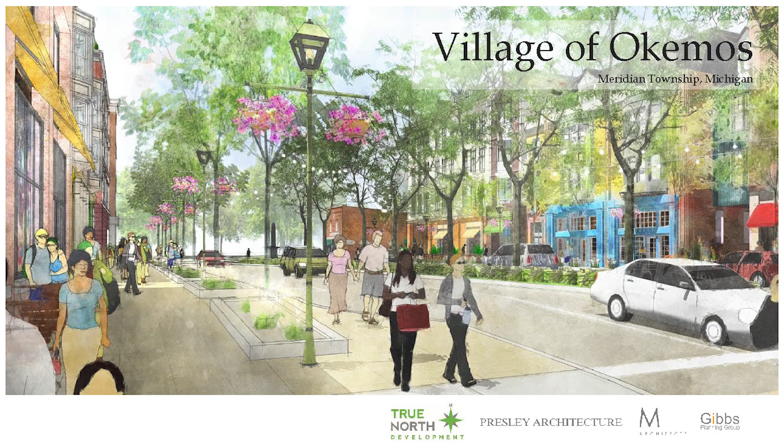Thank you, Kate. I'm going to be moving around, up and down, so I might sit in your seat in a minute. First, I want to give you a perspective on what you're looking at here. This is a view looking down Hamilton Road toward the west at Okemos. If I'm standing on the southwest corner of Okemos and Hamilton looking west down Hamilton, you can see the Hamilton building in the background, which, no matter what happens in this project, will be saved as an historic building. That'll give you reference to what we're looking at.

The presentation you're seeing tonight was put together by myself and my company, True North Development. I'm Chief Operating Officer and lead developer for this project. Presley Architecture out of Northville is involved, and we've also got Hobbs and Black out of Ann Arbor working on the project, along with Gibbs Planning Group. The presentation you're seeing tonight is actually the one given by Bob Gibbs himself to the Board of Trustees a couple of weeks ago, and then given by another staff member from Gibbs to the Planning Commission earlier this week on Monday night.

We've presented a concept plan, and that is purely that, in the eyes of the township. It basically sets the bar and sets expectations. We have basically set the footprints of our buildings in our first phase.

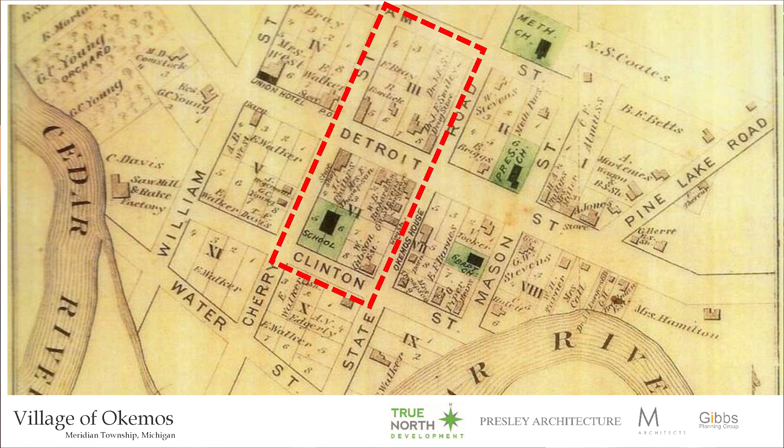The grid and block pattern here is the most efficient block pattern we could possibly use, and we're going to duplicate and utilize it. Bob Gibbs of Gibbs Planning said this is one of the more well laid out sites he's ever worked with, out of thousands around the country. So here are the two blocks we're looking at for phase one — block 1 on top, block 2 on the bottom.

State Street is what's now Okemos Road. Meridian Township has a current population of about 43,400 people, with an average income of 100,000.

You said Detroit Street is Okemos Road — are you sure that's what you meant? No, that's not what I meant. State Street is Okemos Road, yes. Detroit Street is Hamilton. Keep me straight — so 43.4 population, average income of 100.

Here's something really interesting: the demographic profile we're looking at for residents to rent the proposed rental properties is 1 to 2 person households, which make up 68% of Meridian Township. That's a much higher level than most people think.

We're seeing this demographic come at us from two directions — millennials who don't even want to consider buying a home, and long-time homeowners tired of maintaining a big property who are gone six months a year to Florida anyway, and just want a nice apartment to come back to. Although these two demographics seem very different, they like to cohabitate and live in the same places, so we're seeing them come back into urban settings. This is probably the most urban setting Meridian Township will see — it's a relative term, but that's the real attraction.

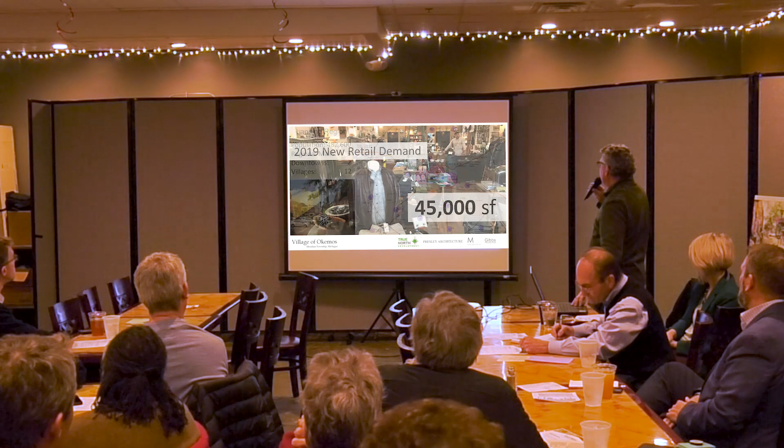We're taking that breakdown one step further, taking somewhat of a rifle approach and assigning preferred uses to the various retail spaces we have to lease. We're going after specific users for those spaces, kind of a limited offering approach.

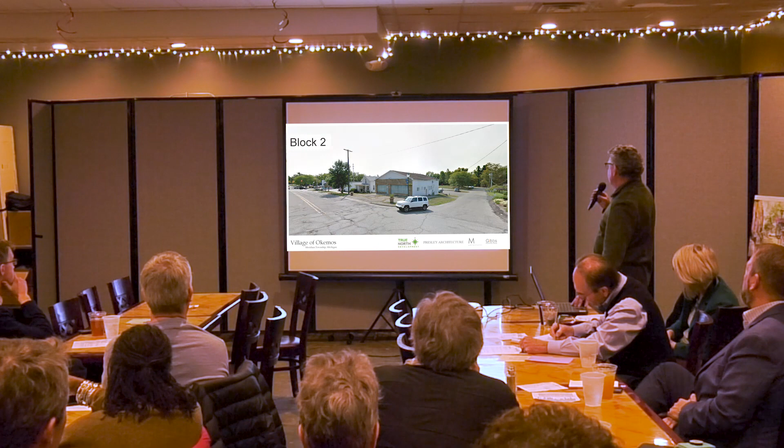This is the existing conditions that we're all too familiar with. There's our beautiful bottoms-up corner. I'm just going to run through these quickly to refresh everyone's mind what we're looking at today.

One of the things we're going to be watching through the project, and I challenge you to watch it too, is what's referred to as a WalkScore. There's an app you can get on your phone where you put your address in and find out your WalkScore. We believe we're going to take downtown Okemos from around a 50 right now, and we hope to get up to something close to what you'll see in downtown Petoskey today, which is an 85 or 90.

In that scenario, we're also addressing pedestrian safety, but also bicycles and how everybody shares the road with the cars.

We have a very unique situation in that we've got a 15-acre park that's very underutilized immediately to our south. So we'll be working diligently with the homeowners along Clinton Street to try to program some connections, some really strong connections through the wetlands and additional sidewalks or trails to establish that connection down to Wonch Park.

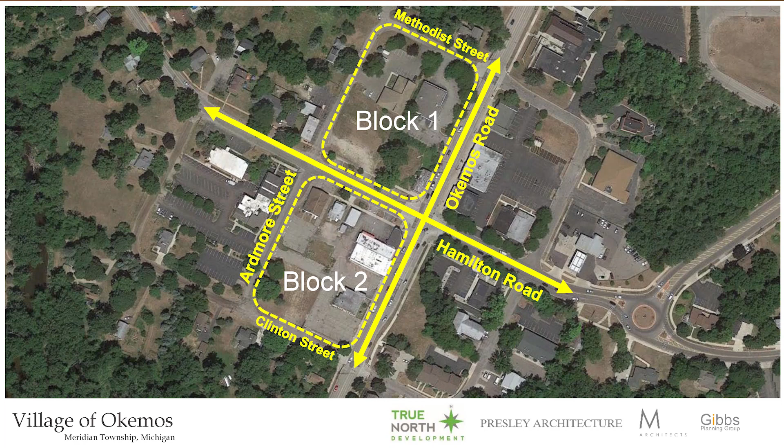The next phase that would be developed, assuming these two are successful, would be to go to the next block to the west, where Douglas J. will be leaving that building and coming to the new building at the corner of Okemos and Hamilton.

Along Hamilton Road, we've got apartments over retail. We thought it was very important to put both sides of Hamilton in the first phase of construction because that's what's going to create that place. And that's the real amenity of this project is the place that's going to be created.

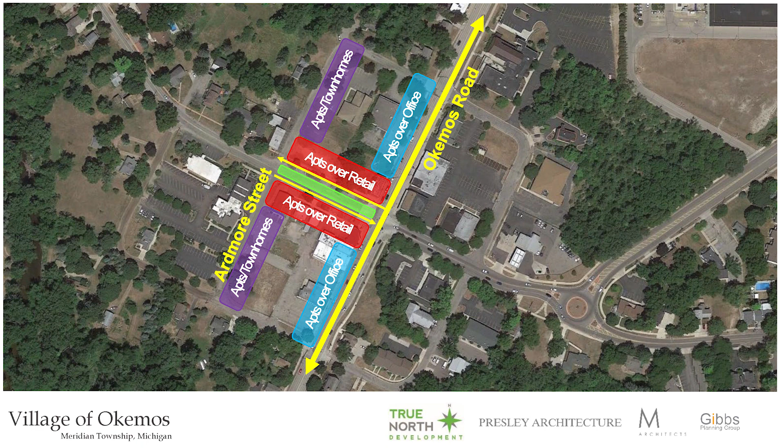Along Okemos Road itself, we can't put parking in front of those buildings, so we're looking at apartments over offices along the Okemos Road frontage. Then along the Ardmore Street frontage on the backside, we go to a purely residential use where we have townhomes on the top and bottom of the building and flats in the middle. So that's pure residential. The parking is interior to the buildings. It's almost a Texas donut, as they refer to it in the development business, where the parking is wrapped by buildings.

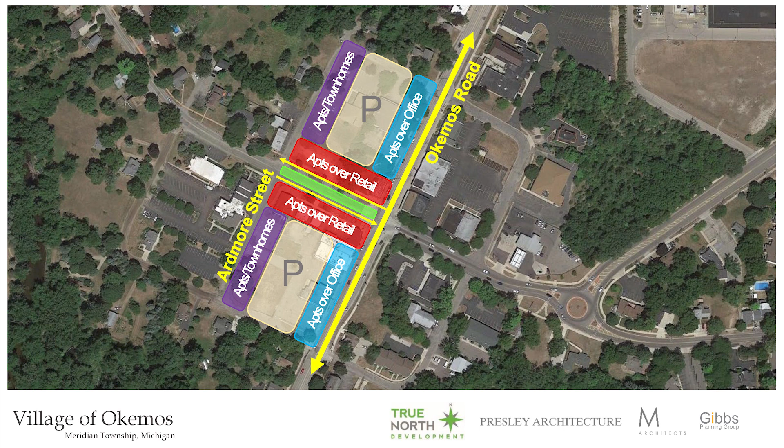Block 2, to the south, gets an entire level with 206 parking spaces below grade. Those 206 spaces will be the priority parking for tenants who choose to live here full-time.

We've got a total of 40,000 square feet of retail coming in this first phase, along with 27,000 square feet of office, 20,000 of which will be allocated to a collaborative workspace.

We have a national company that has come to us, and we're working with them on a Lansing site too. We're excited that it's coming here because it's truly an amenity to the demographic that's going to be living here. It'll be something like what you've seen with WeWork and/or Regus - a new startup company involved in that industry.

We're going to have 8 to 12 service businesses and 3 to 5 restaurants. We made the sidewalks on the north side of the street wider so we can better accommodate curbside dining in nice weather. We want that wider sidewalk on the south-facing side of the street. Again, walkability is going to be a real focus.

Also, signage - we're going to be encouraging vintage type, very eclectic signage that's going to be very unique. And again, outdoor dining spaces that will be seasonal, coming and going. We always park cars on one side of the street, which provides that barrier and some safety for people dining on the sidewalks.

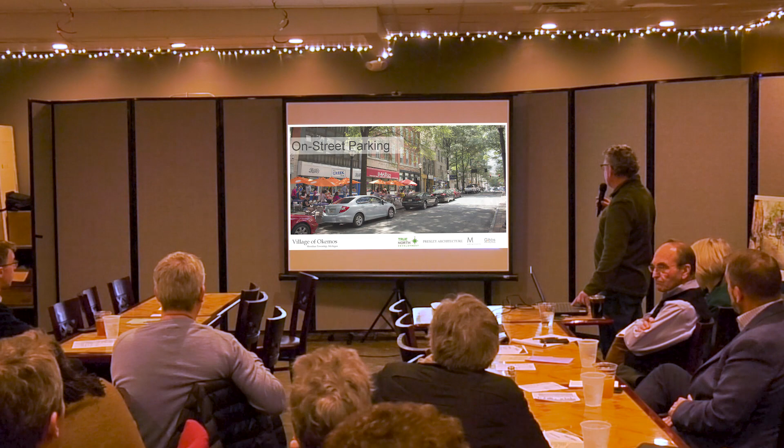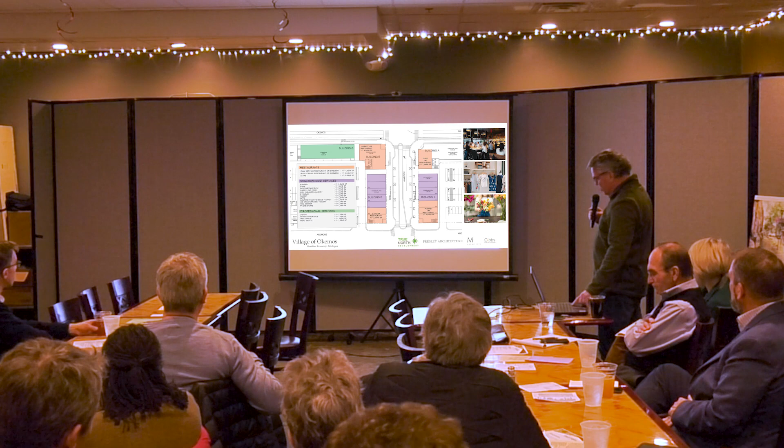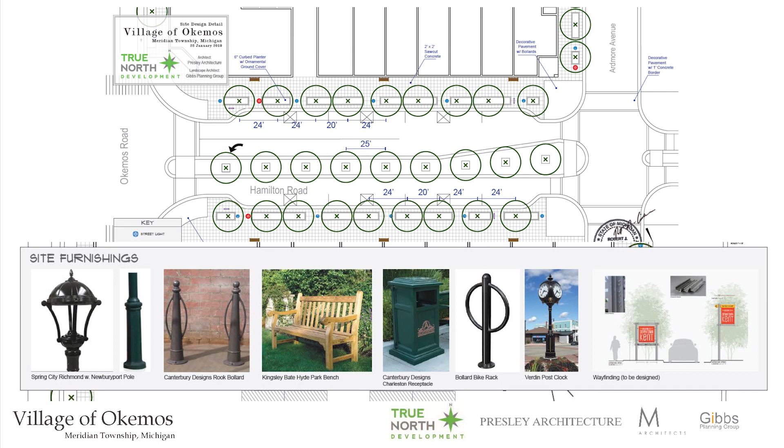This gives you an idea of the level of detail we're going into regarding the streetscape. This is still a work in progress - we're playing with the idea of snow melt under the sidewalks on the Hamilton Street corridor. These site furnishings give you an idea of the level of quality and thought going into all of this. This is the streetscape program.

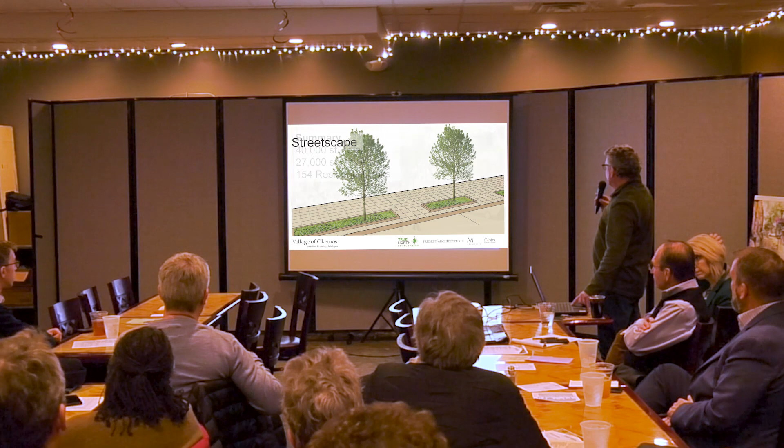Summary: 40,000 square feet of retail, 27,000 square feet of office, for a total of 276,000 square feet of buildings in the first phase, in 5 separate buildings, and 154 residential units. This is a reduction from where we were early on when we talked to this group. Due to the planners and architects involved, we think there's an appropriate scale and an appropriate style for these buildings.

Now our plan and our challenge is to figure out if we can afford to build the buildings that we'd like to build. This is somewhat of a 'go to the end and back up' situation.

As you know, we've established the TIF program back with the DDA in downtown Okemos, and that's going to be the vehicle we use to establish the TIF district. We'll be able to recover these public infrastructure costs that are so great, including the environmental cleanup and the brownfield.

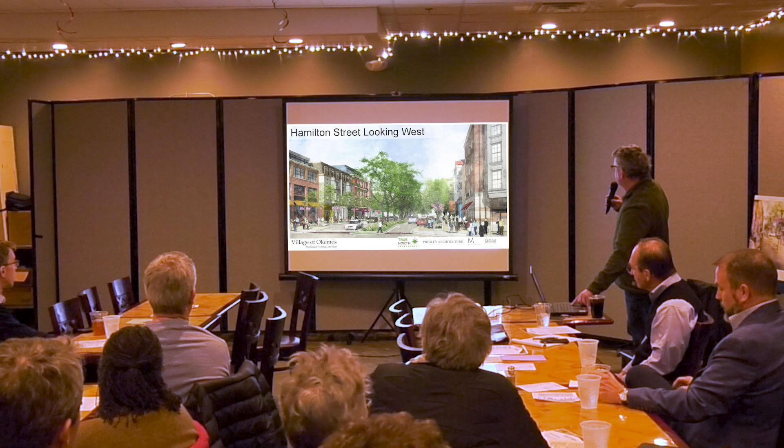I'm now going to let Robert Miller step in and give you a bit of the architecture. Understand that the footprints and heights of these buildings are much more set at this point than the actual facades and elevations. We're starting that study now and trying to identify the various materials. So some of the specific questions you'll have tonight, we're probably not going to have answers for yet, but we promise the answers are coming.

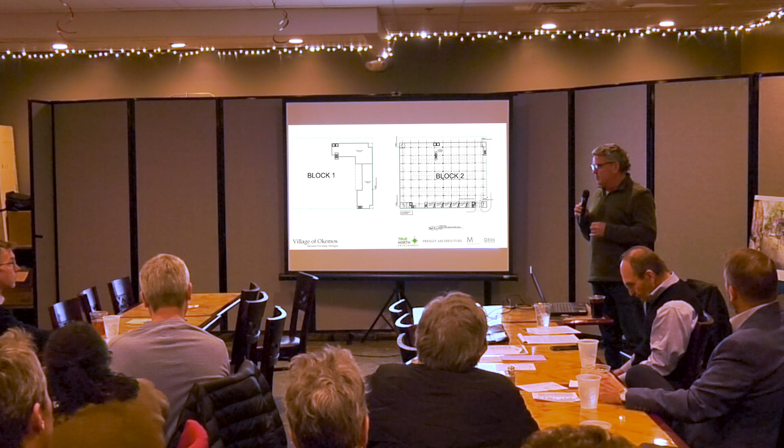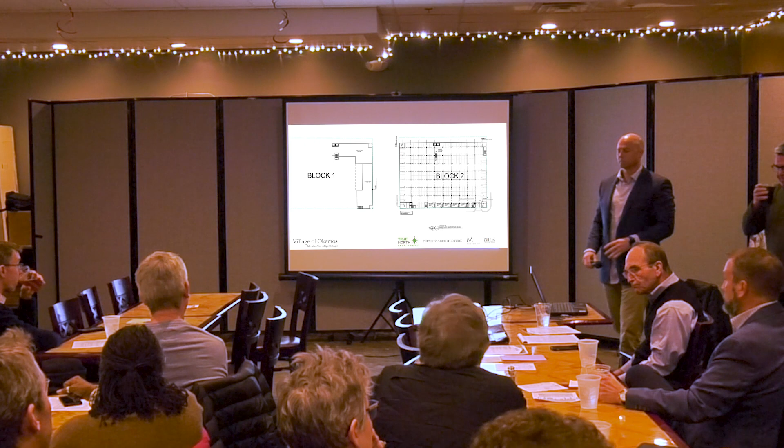Go ahead, Robert. Can everyone hear me if I don't use the microphone? Okay, great. Good evening, I'm Robert Miller with M Architects, one of the architects. The cameras need it. Oh, the cameras need it, okay, all right. Sorry, I really don't. Technology.

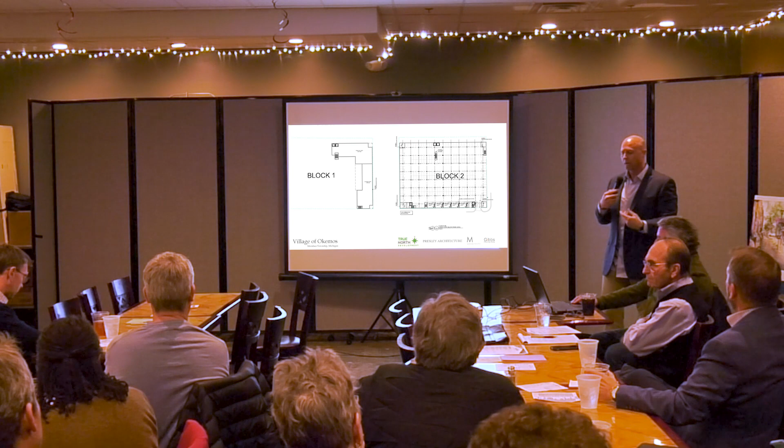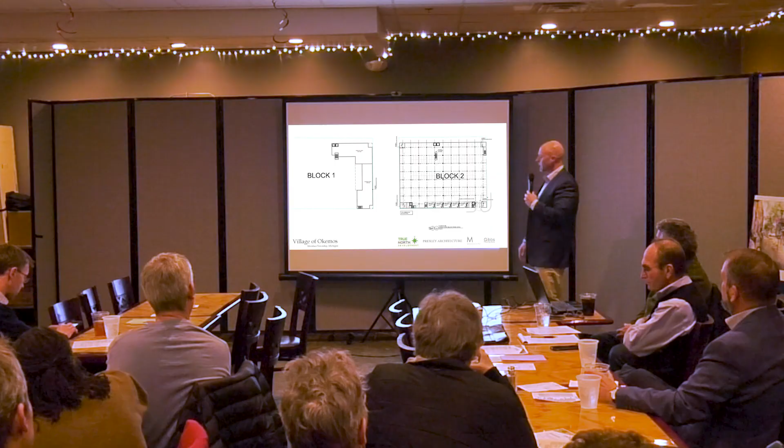If we take a look at the floor plans, Block 1 will be on the north side of Hamilton, Block 2 on the south side of Hamilton, with Hamilton coming straight through and Okemos up on top. What you're looking at is technically the basement level—basement underneath Block 1, and Block 2 is what we're calling the underground parking.

However, it's kind of underground, not underground—almost like a walkout basement, because we have a low point at Clinton Street and another low point up at Okemos Street, with high points throughout. So this part here is actually down at grade level at Clinton and Ardmore. When you pull into the parking structure, you're actually pulling in at grade.

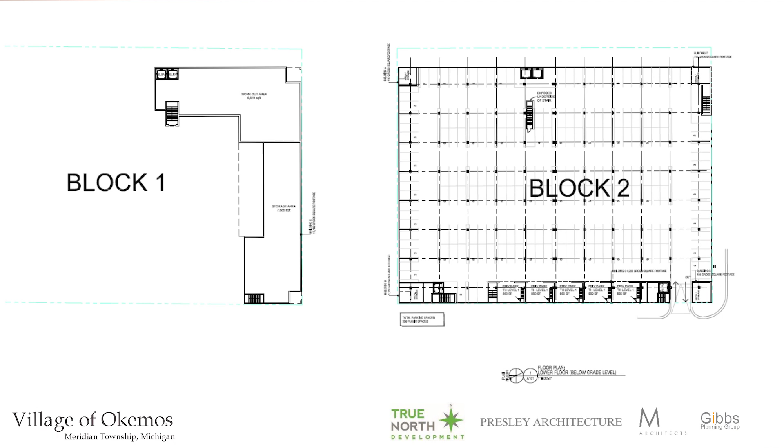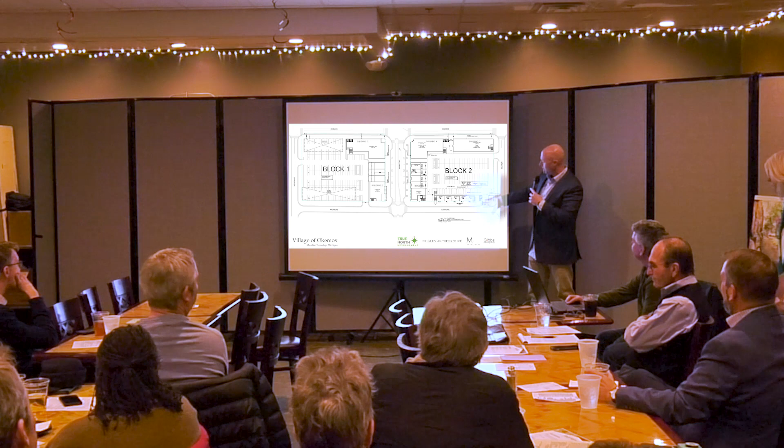You're not dropping down. So if we go up one more floor to the first level—sorry, Will, thank you—as we come up, we experience this at Clinton and Ardmore, where we're driving underneath the actual ground level of the project. This will be the ground level, the first floor.

We're going to have retail along all corners of the building along Hamilton, on both sides, so Hamilton almost becomes our main street—this becomes the center core of Main Street. We'll have Douglas J up in the corner, more as the entry gate point into the development, and ground level parking behind the spaces with townhouses along Ardmore.

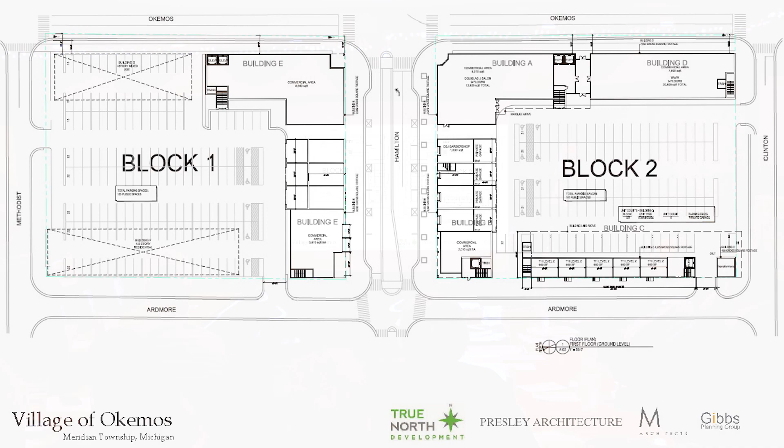Going up one more level, at the corner of Okemos and Hamilton, we continue with the second level of office space and retail space, again Douglas J, and then we begin our residential units. The second level will be residential units, and the third level will be residential units as well.

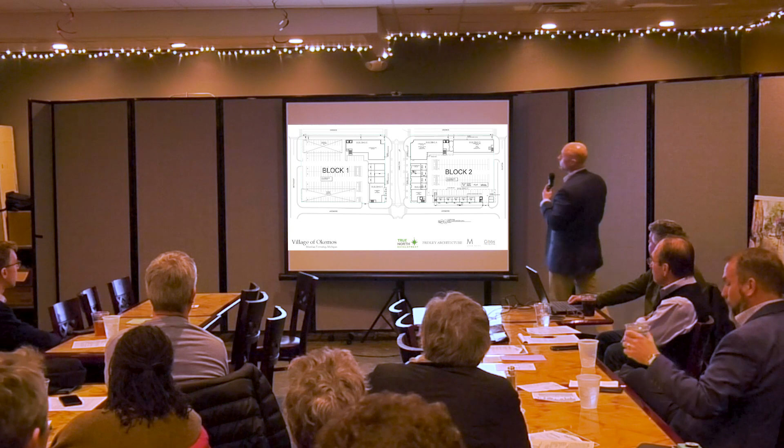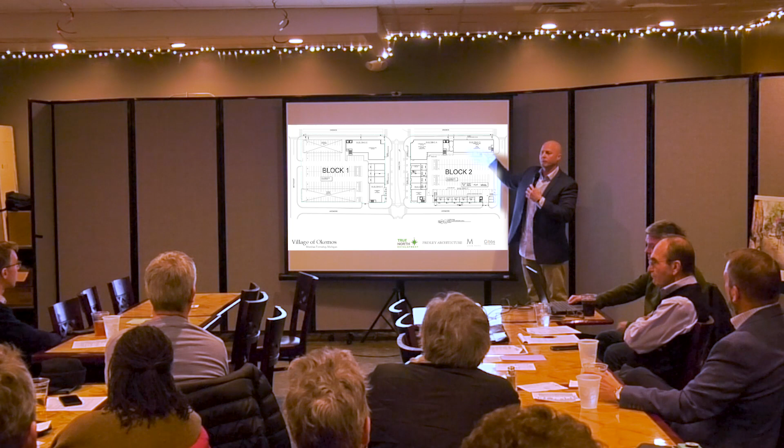The fourth level will be residential units, but importantly, in certain areas, though you probably can't see it, these areas are actually not units—they're terraces for amenity spaces on the upper level. We want to pull back the height, reducing the scale and proportion of this building to reduce its size and impact.

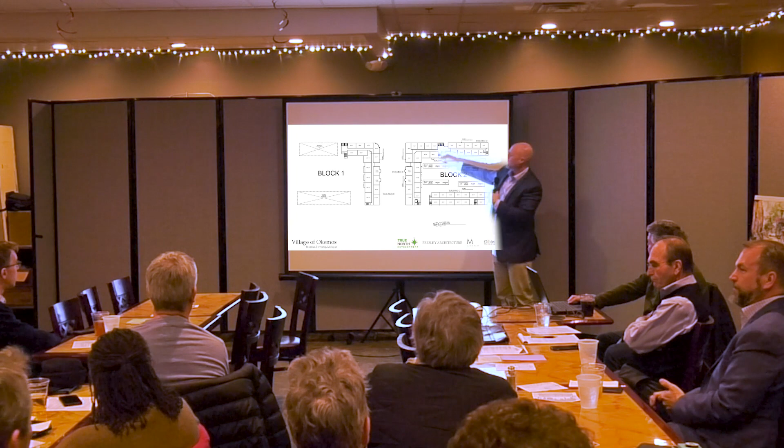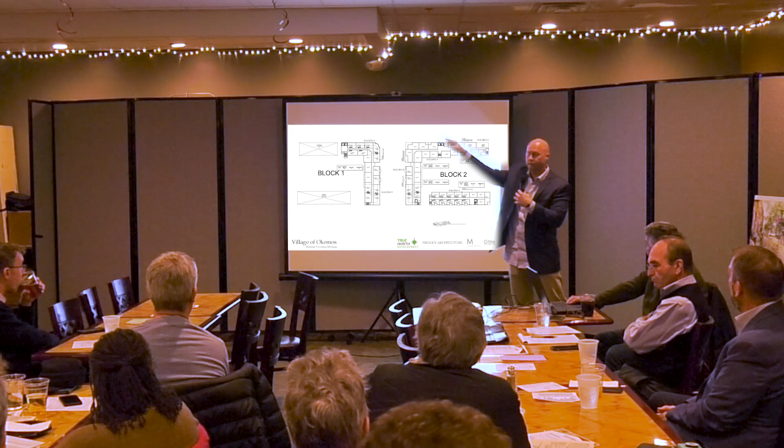So we start cutting out corners so that we're not looking at 5-story buildings—we're not even looking at 4-story buildings. We're looking at 3-story buildings with setbacks for 4th levels and setbacks for 5th levels, which, if we get to the 5th level, we've drastically reduced. According to the ordinance, we could build a 5-story building on all these blocks, but we felt that was too much development for this village.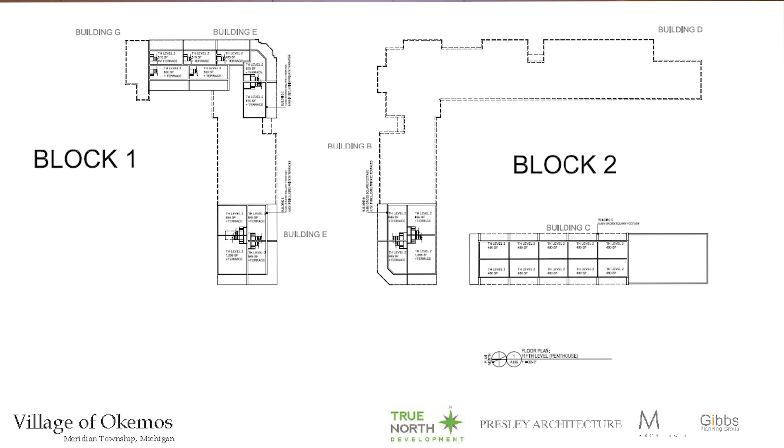So we're only looking at small areas and pockets with 5th floor levels, and even then those are set back 10 feet from the 4th floor below. So when you're on the street facade, you don't really experience that 5th level, and in some cases you hardly experience the 4th level either—that'll be a rooftop terrace. Those 5th floor areas are only reached from within the townhome that originates on the 4th floor, just so you know.

They're 2-story townhome units at that level. And that was it.

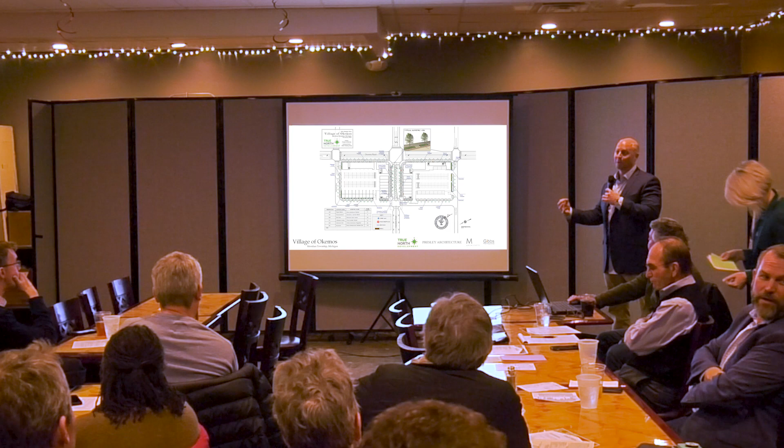I want to do that pretty quickly because I'm sure y'all got questions and want to meet up with us. So I wanted to go through that pretty quickly. At that point, I'm going to pass it back over.

Okay, perfect. So what we're gonna do is go through some of the more general questions. If there's any other general questions, throw them up in the air, Caleb will come around and grab those, and we'll go through some of the big picture general questions together, then break out into smaller groups.

We're gonna start with the questions about this stuff, and I'm gonna let Genti... we'll save traffic and environmental questions for after his part. We'll answer these questions now while he's changing over to his presentation, and then do the same for traffic, if that makes sense.

So the first question we're going to go through—as Will said during the presentation, some of these are things we don't quite know yet. But one question I think a lot of you would be interested in is what the anticipated rent for the units will be, and if there will be any condo units available at this point.

So Will, you want to tackle the rent question? Yeah. You want to talk about the research that's been done so far? We actually know where the rents need to be, and that's what drives what we can afford to build.

The other improvement we are proposing is to add a left turn lane between Methodist and Clinton at this phase to allow lefts onto Hamilton from Okemos Road. Right now, these lefts are made at Methodist and Clinton, which are not really meant for that. Especially at Clinton, if you are making a northbound left, you are stopping on the through lane, blocking through traffic, essentially cutting the capacity of that road in half. It also leads to unsafe behavior because you're waiting for traffic to clear from the southbound movement, and everybody knows how busy this road is, so eventually you will just go for it. By removing the left turns at these points, we're allowing them at the intersection of Hamilton and Okemos.

The other improvement we are doing is on Hamilton Road, as Will touched upon, we're introducing a boulevard there. That boulevard serves different purposes. One is it better allows us to align the road's cross section with the new changes we are making to the east leg of the intersection, but also serves as a traffic calming device because vehicles tend to slow down as they're going through the area. So you can imagine driving through here all the way up to Deliverance, vehicles will probably have to slow down because of the boulevard and the parallel parking. Also, the median serves as a refuge for pedestrians crossing the street. It creates a more sense of place and a more walkable environment.

So that's the general idea of the traffic study. This traffic study was actually approved by the county as of last Friday. Overall, level of service will remain at acceptable levels, and we project to see some improvements for the westbound movement on Hamilton as well as the northbound movement on Okemos.

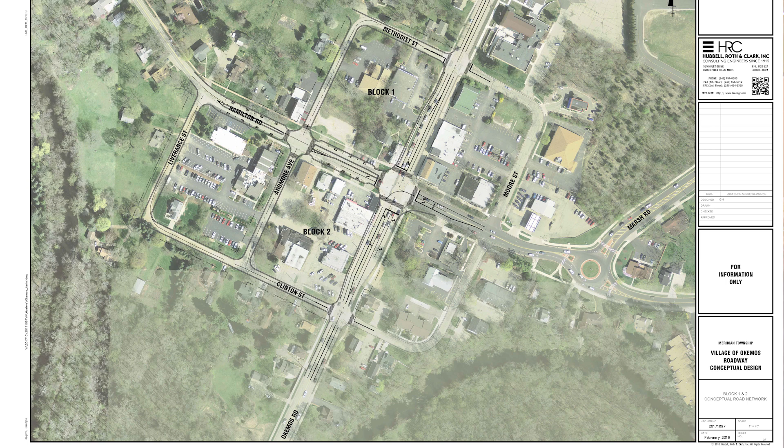It hit on the fact that we're given 14 feet of land and the accommodation of a bike lane. So the goal is to widen the street from the center line westward. Basically, we're adding 10 feet that doesn't exist right now for the left turn lane, and an additional 4 feet for the bike lane, which at this point will go from the project limits at Methodist all the way to Clinton, and hopefully once new projects come online on the other side, they can build on that connection.

Alright, so we had a couple of traffic questions. Can you talk a little bit about how some of these changes will reroute and change traffic around Okemos Road? In particular, it wasn't one of these questions, but I've heard repeatedly concerns from neighbors along Hamilton about people cutting through. Can you talk about how some of these changes will affect that, please?

Sure. So with the first question on Okemos Road, we're not really rerouting any traffic. The volume on Okemos Road will remain there. There's very limited options to get to the freeway, so we recognize that, which is why we're making these accommodations. As it relates to Hamilton, we're not projecting any cut-through traffic. One reason is the boulevard will serve one purpose: it will slow people down. The signal itself will also slow people down because it doesn't really prioritize Hamilton, it prioritizes Okemos. So those are some of the things we're doing to minimize those issues.

And then another question we had, it's probably going to be kind of a shared question, but the construction itself, the impact of the construction itself, whether that be on traffic, on the nearby areas and the neighbors themselves, can you speak a little bit to the impacts of the actual construction? And then we'll go to kind of the...

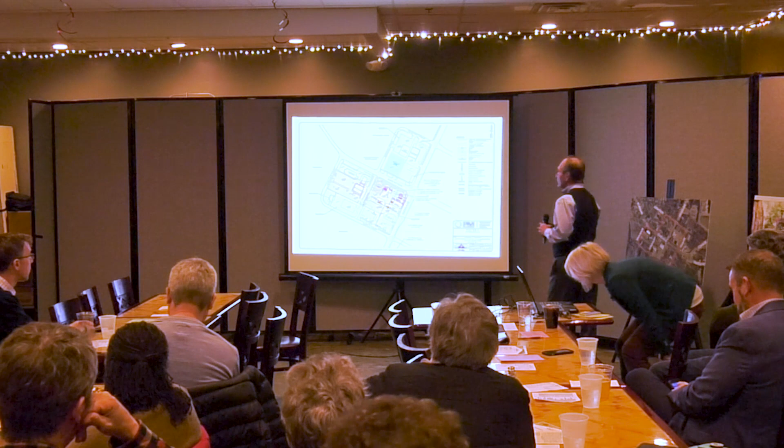Okay, so real quickly again, that's where the cleaners is, right there on the corner of Hamilton and Ardmore. The areas you see identified in different colors are different activities that are going to occur. The green is the petroleum-based area that will be remediated. The yellow area indicates the area eligible for the tax increment financing reimbursement that's part of the loans that go with this. So in a nutshell, Bottoms Up, that's where the old gas station was.

There's currently soil borings being done on the site, so the water table is going to be established, and we're going to know where we are in that regard as well. All of those areas are out of the floodplain, so that's not a factor from an environmental perspective.

I'm gonna pull up a couple of the others—that's just simply indicating the buildings that will come down. Again, that's just the cleaners there, the old cleaner site. So all those X's that you see are structures that will come down as part of this effort.

Okay, so I'm gonna steal this back. If you want to hold up your environmental questions, if you have any, as we go around, and then I'm gonna have you address one that we had from before. I know you mentioned this isn't in the floodplain specifically, but if you want to talk a little bit about this, that'd be great.